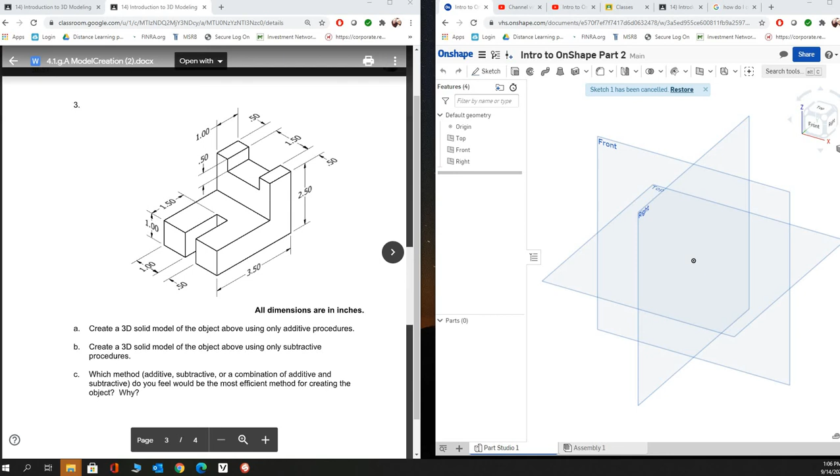All right, so up next we got our second part in OnShape in our Intro to OnShape series. So far we've gone over how I want you to organize the parts, we've gone over the first part, and now we're into part two.

Part two is in millimeters, so make sure you change the units. In class, I was trying to figure out how to change OnShape to default to millimeters, and it's actually up in the document menu. Click on document menu, then workspace units, and change that to millimeters, since it says all dimensions are in millimeters here. Once we change it, we won't have to worry about any conversions. It automatically does it in OnShape.

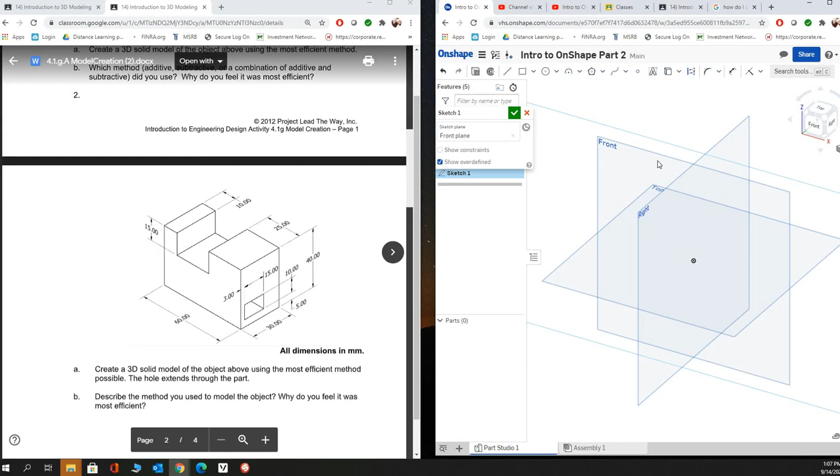After that, we're going to start our sketch on the front view, and I like orienting the front view to face you when you're working in that sketch. So again, we're working through our steps in CAD: make a 2D sketch, dimension that sketch, and then extrude that sketch.

Right now we need to make an outline of the side of this shape. That outline is just going to start with a rectangle, and then we're going to do another rectangle inside of it.

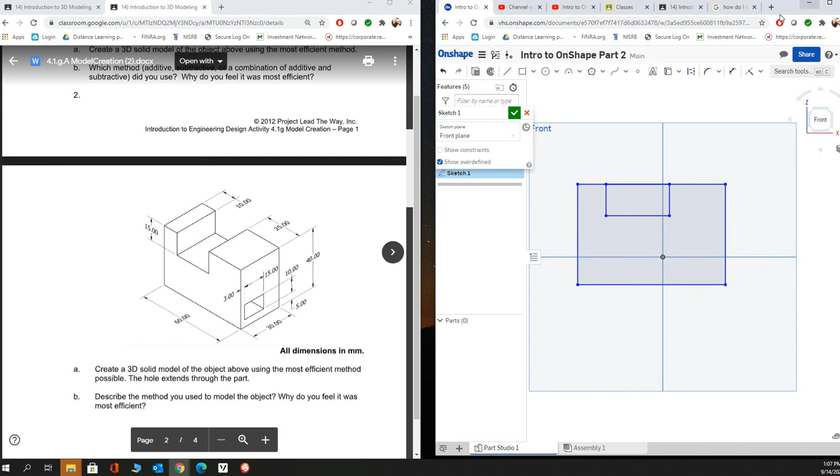Once we're done with that, escape from rectangle, and we're going to select our trim tool. Here's our trim tool, that little pair of scissors, and we're just going to cut the extra lines that we have in there out. We have to click on it twice because we put in two lines right there for our rectangles.

Once we have that out, now we can start dimensioning it. Our dimensions on this one, we're looking for all the dimensions going in a single direction. If we start off with our largest dimension going across here, we can look at all of the dimensions running in this direction in our isometric drawing. From here all the way across is going to be 60 millimeters. We're going to just say 60, and if you didn't change your units to millimeters, you could always put in millimeters in there and it would convert it automatically, and we already did, so it shows up as 60.

Then we're going to have top to bottom. Sorry, I just said we need to put in the same direction all the time, so let's find all the dimensions that go across our part. We have our 60, the 10 is going across the part. You can see how this arrow is going in the same direction as this guy. So we're going to go all the way across here, so that should be 10.

And then you have 25. And then you have 15 from top to bottom here. So we have all our measurements going in two directions here: our 60, we've got 15 taken care of, 10, 25. We don't have to do the one across the middle here because you would add these two together, subtract it from 60, and that would give you your distance going across there.

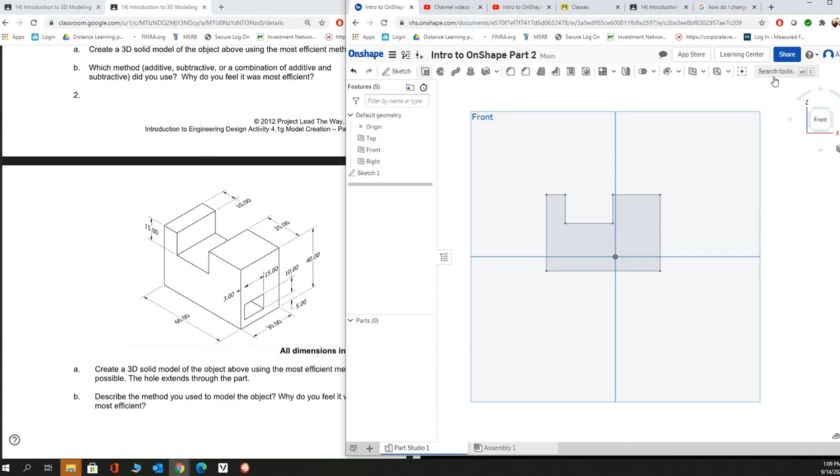So we're done with dimensioning the sketch now. We're going to hit finish sketch, and we're going to extrude that sketch, and I like to extrude from an angle here so that we can see how far that extrusion is going. It says that it defaults to 25 millimeters, but it should be 30 millimeters for our measurement. So we're going to hit OK.

We still have that little box to put on the side of the part, so we're going to start on the side of that part. We're going to hit sketch, and start our sketch on the side of that part file. You can see how it added sketch 2 in there, it even says sketch 2 right there. So we're going to go from that angle and put our little box in there.

So we're going to just use a corner rectangle, boom, boom. I'm going fairly fast for if I was teaching this in class, but since this is YouTube, you guys are able to pause and slow down or rewind. So I am going quickly, but you can always stop and rewind what I'm doing.

Now we've got to have our two dimensions in there. Again, this is a secondary sketch, so it needs to have dimensions telling us where it is in relation to the main part, and it also should have dimensions on it telling us how large this hole is.

So we're going to start off with our feature dimensions. Across this should be 15 millimeters, and it should be 10 millimeters high.

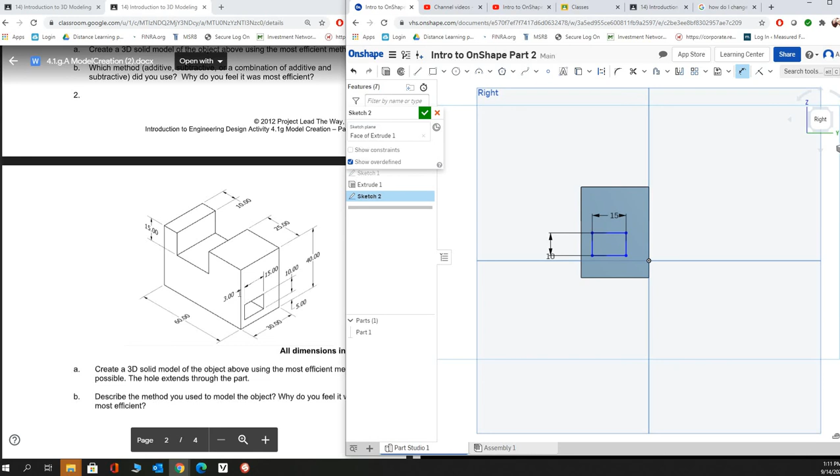Now we know how large that rectangle is, but we don't know where that rectangle is placed yet. So we're going to say 3 millimeters across, or from the edge, and then it should be 5 millimeters from the bottom. So we have our placement dimensions: 5 millimeters and 3 millimeters, and then we also have our feature dimensions, which tell us how wide and how tall that rectangle is.

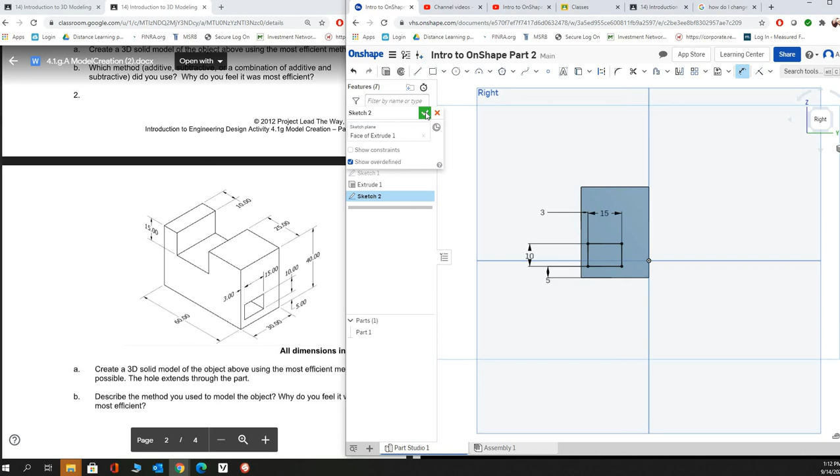We're done with that part, and now we're ready to extrude it. Our extrusion though, this time it defaults to adding something. In our case, we're making a hole, so we've got to change it to a subtraction extrusion, or a removal, which is called that in OnShape. So we're going to remove that material, and in our drawing it doesn't actually tell us how deep the extrusion is, so we're just going to let it default to 25 millimeters.

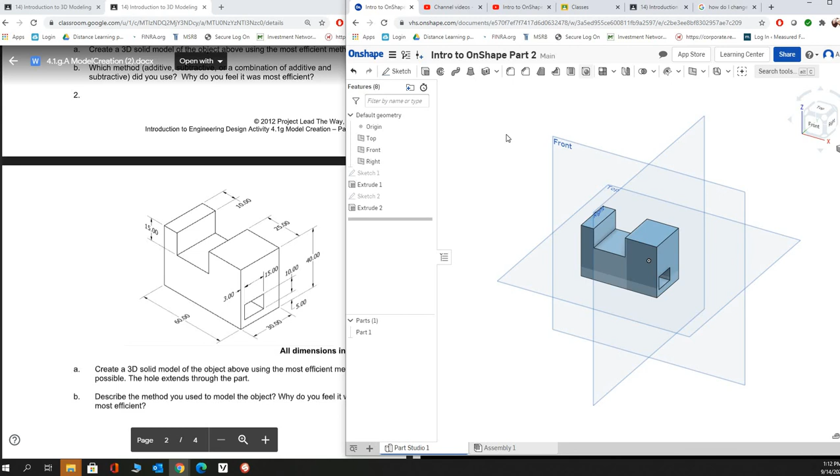Once you have that there, you're done. This part is fully created, you're good to go. All right, so now I think that's it. I'm going to end our video here.